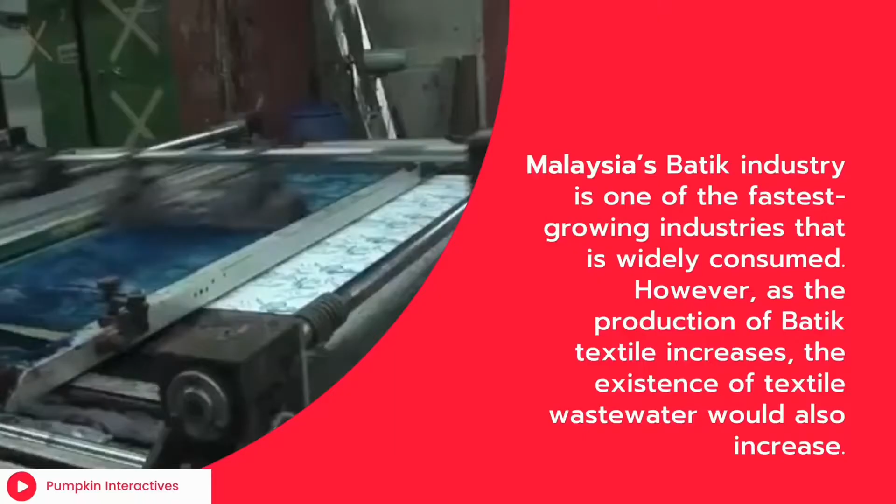Malaysia's batik industry is one of the fastest growing industries that is widely consumed. However, as the production of batik textile increases, the existence of textile wastewater will also increase. Hence, Bleka is invented for neutralizing and filtering textile waste such as bleach before releasing it to the river. As a result, Bleka can easily reduce water pollution, thus ensuring clean and safe water quality in Sungai Hiliran Terengganu.

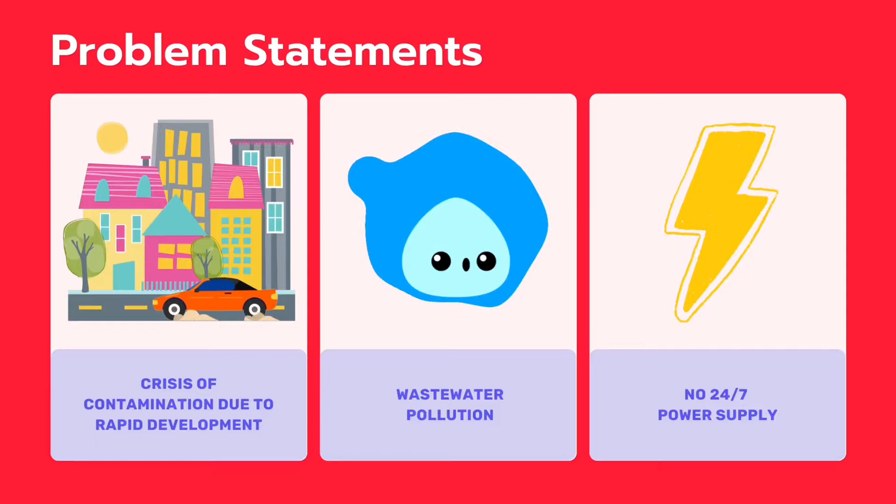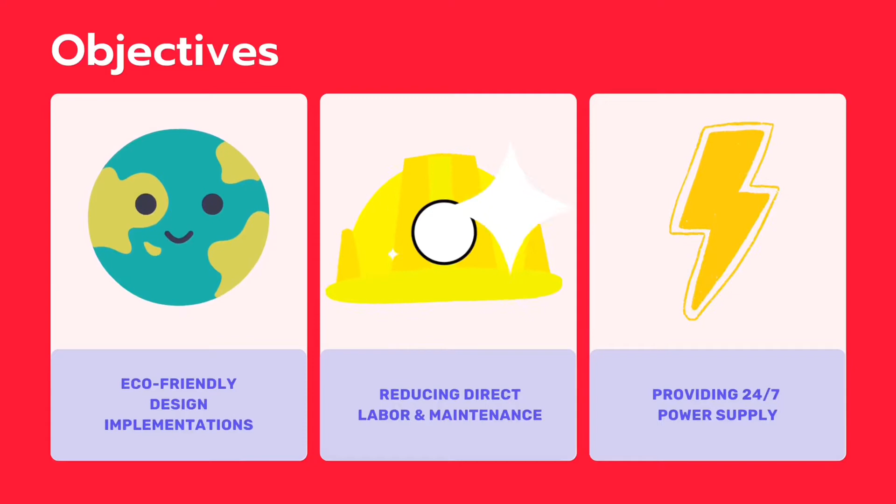Our problem statements are the crisis of contamination due to rapid development, wastewater pollution, and no 24/7 power supply. Our objectives are eco-friendly design implementation, reducing direct labor and maintenance, and providing 24/7 power supply.

According to Malaysian Investment Development Authority, textile industry in Malaysia is our nation's 30th largest exporting industry. Batik industry alone contributes a lot towards the economic growth in Malaysia according to Sridewi 2011. This industry also produces textile wastewater, which is the most polluting among all industrial sectors such as pharmaceuticals, pulp and paper mill. This comes from the bleaching process.

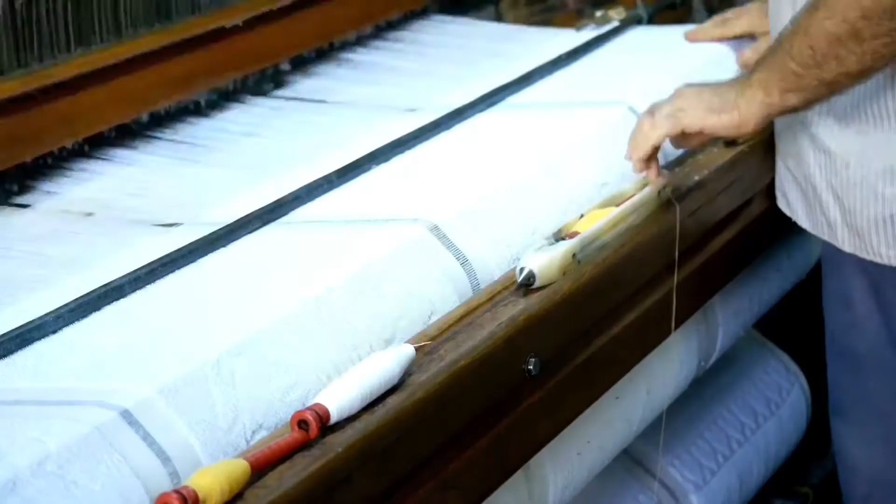Bleaching process is an essential step in the pre-treatment of textile. Besides this industry, rapid development also contributes to contamination of the waterway due to indiscriminate garbage disposal.

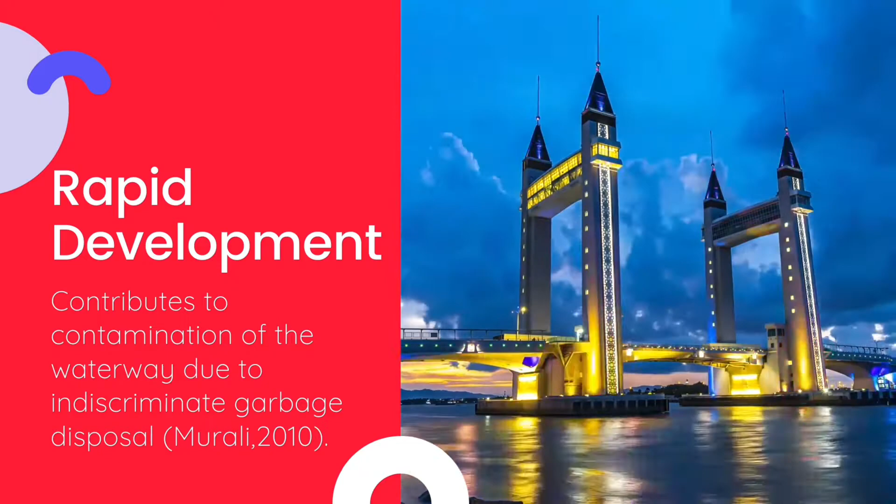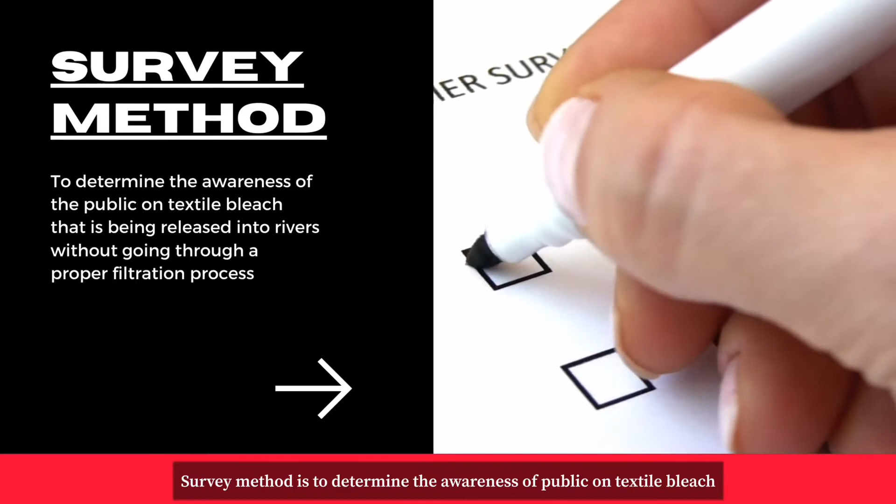Survey method is used to determine the awareness of the public on textile bleach that is released into the river without proper filtration process.

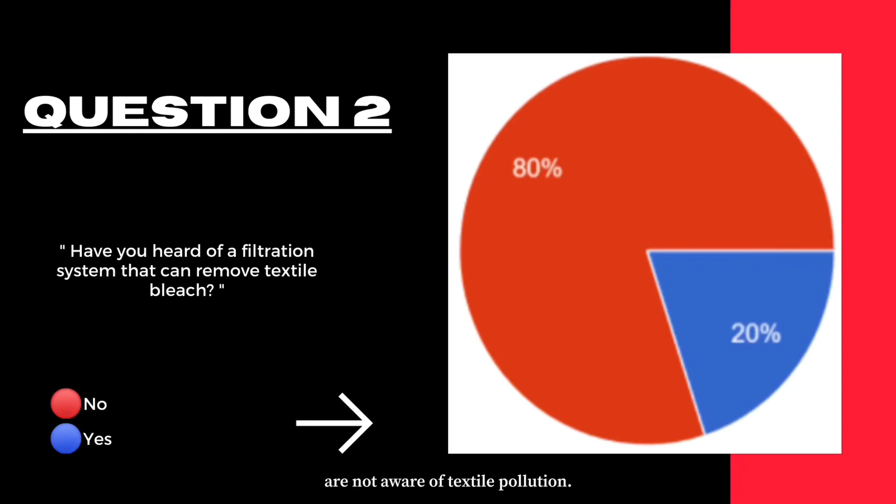From the previous question, we can see that the majority of our respondents are not aware of textile pollution. Therefore, it is explainable why 80% of respondents voted no, because they never heard of a textile bleach filtration system.

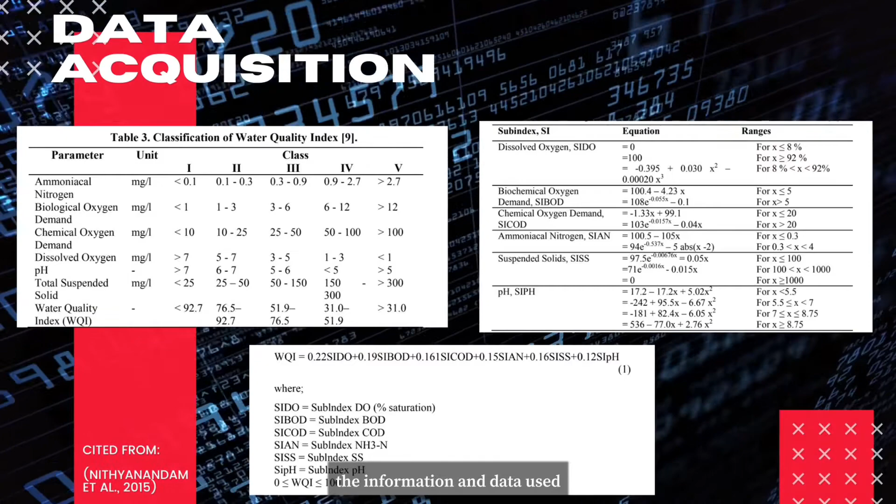For data acquisition, the information and data used in this project for calculation of water quality index is based on a Journal of Engineering, Science and Technology case study of analysis of water quality in Sungai Batu Ferringhi.

For testing viability of the project, the project is viable since the cost of Bleka is worth it for a long-term run and will affect local communities who live within the area.

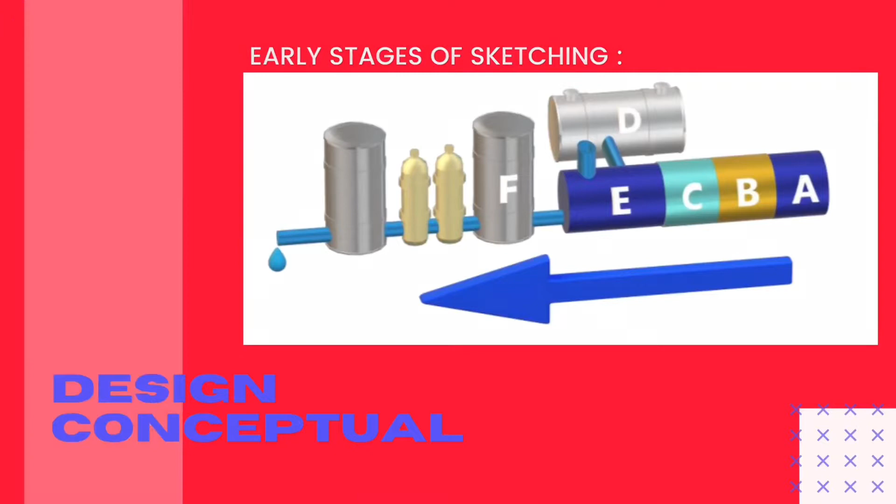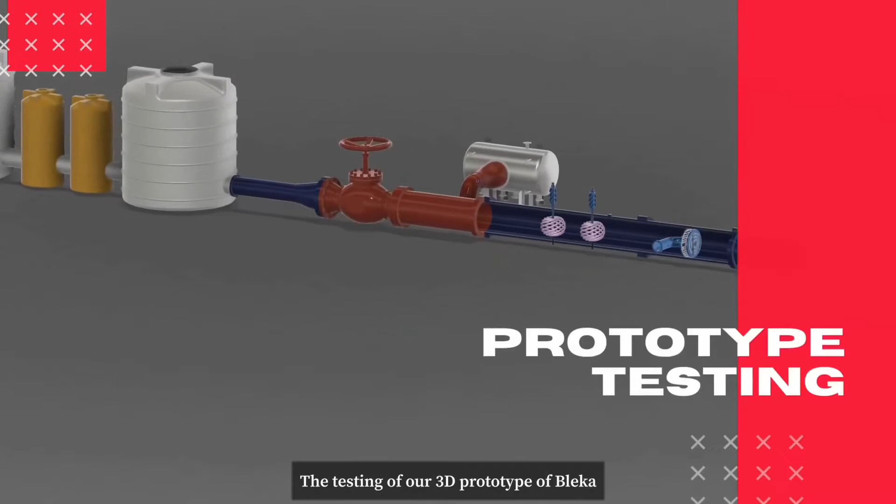This is the early sketches of our project Bleka. This is our prototype fabrication from the early stage until we reach the final stage of the Bleka invention. The testing of our 3D prototype of Bleka was done by using simulation in Fusion 360. And these are the final products of Bleka, big and small scale.

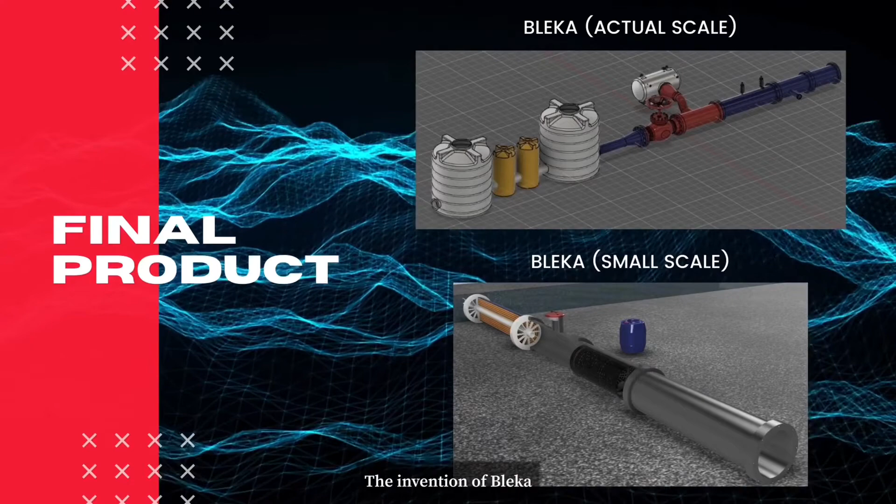The invention of Bleka met our objectives, which are the implementation of eco-friendly design, reduction of labor and maintenance, and providing 24/7 power supply.

The first method is to brainstorm ideas among all team members based on the themes given. Data analysis could be done after collecting surveys on the project for analyzation. Understanding the failures and doing improvisations on the sketches produces a great quality final product.

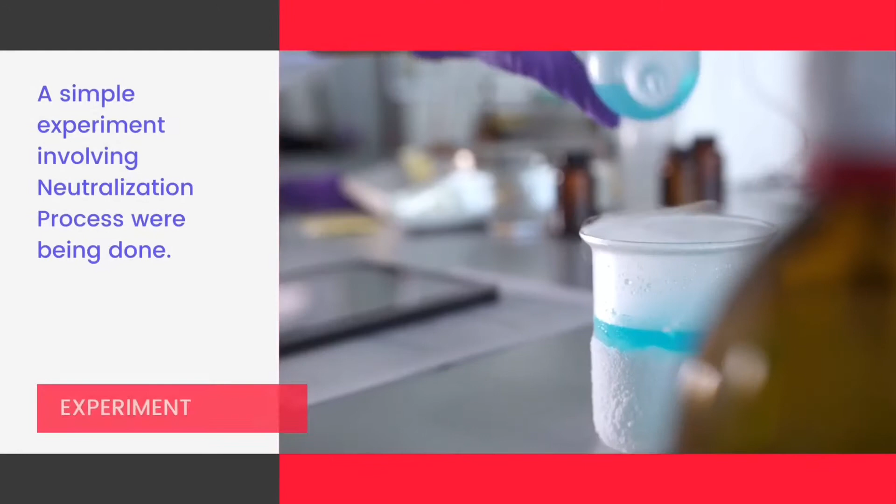A simple experiment was set up to observe and calculate whether the neutralization process is a success or not. Finally, a final report on the failures and improvements of the project will be reported and submitted by week 12.

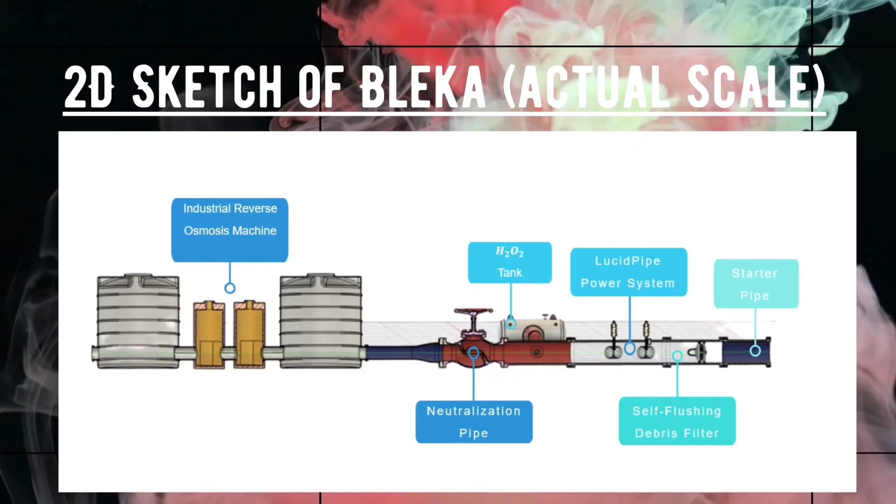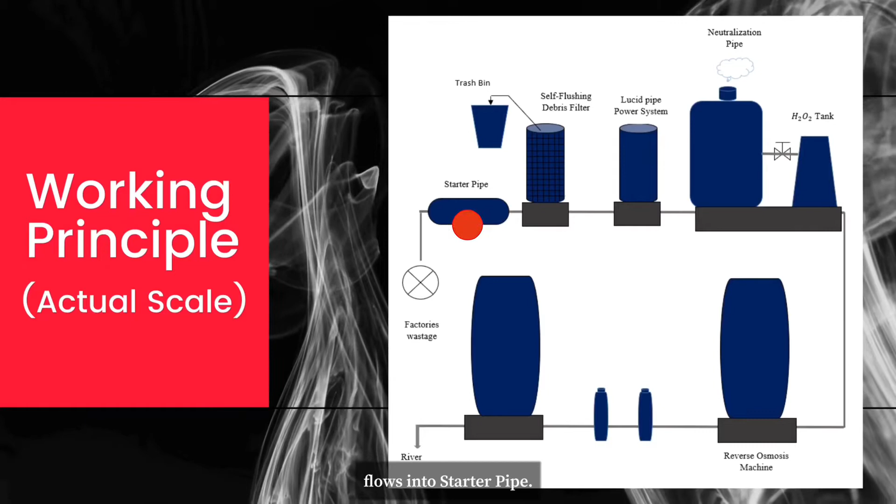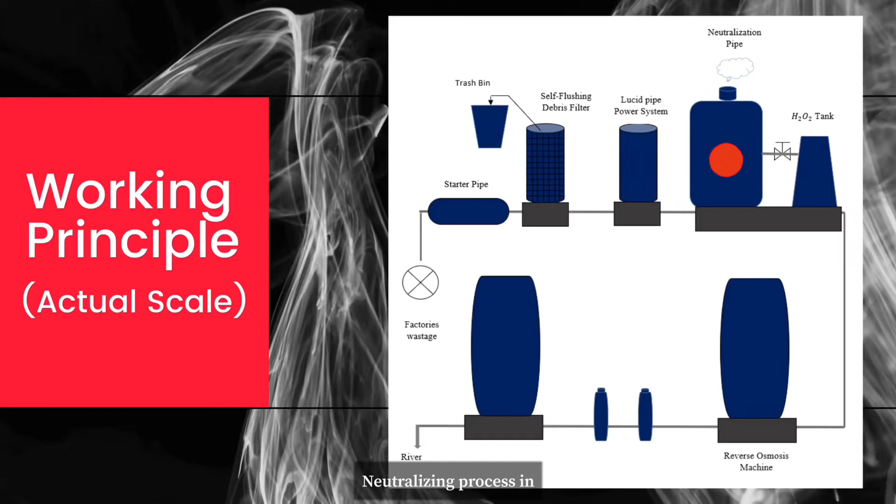Bleach wastewater from the textile factory flows into the starter pipe. Self-flushing debris filter filters out fabric scrap to avoid plugging issues. Lucid pipe power system generates electricity by water motion. Neutralizing process occurs in the neutralization pipe. Hydrogen peroxide is used to neutralize bleach wastewater. SSSV prevents blowout in case of sudden pressure increase. Industrial reverse osmosis machine cleans out any impurities before releasing into the river.

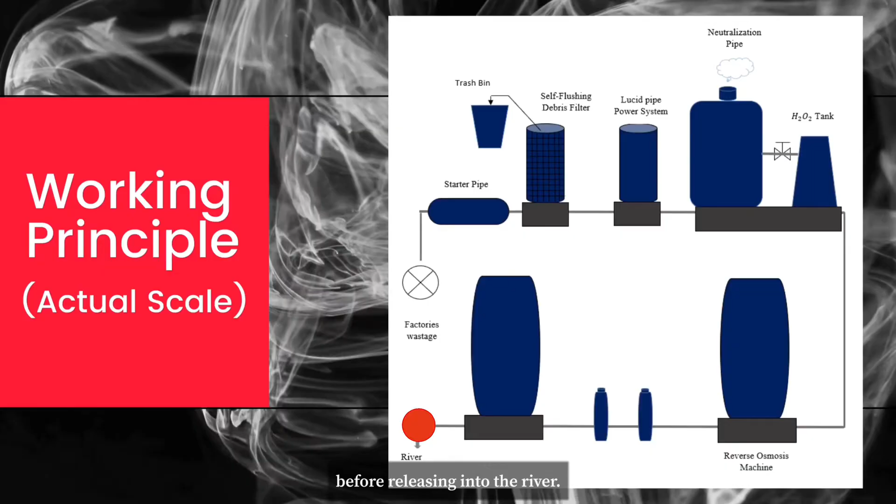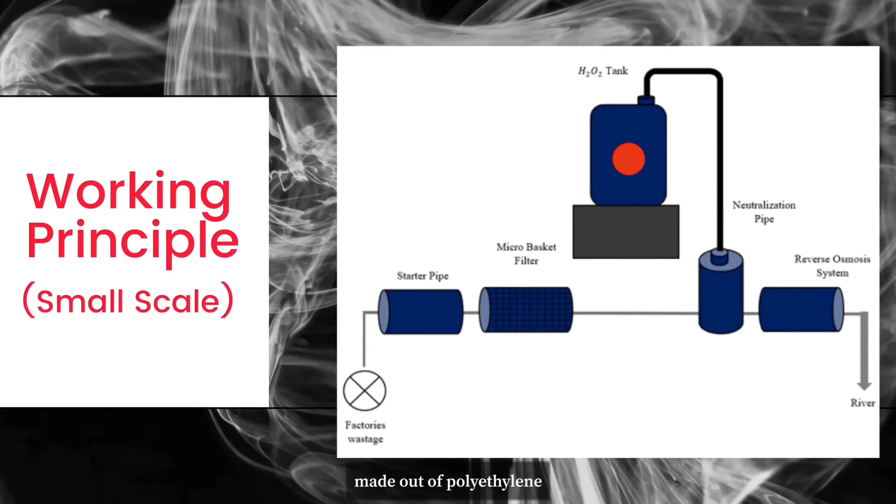Bleach wastewater from the textile factory flows into the starter pipe. Microbasket filter filters out fabric scrap to avoid plugging issues. Neutralizing process occurs in the neutralization pipe. H2O2 tank made out of polyethylene stores hydrogen peroxide. Reverse osmosis system cleans out any impurities before releasing into the river.

Milliliters of both bleach and hydrogen peroxide were measured and pH readings were taken. The two substances are mixed and a reaction occurs. Gas bubbles form, indicating oxygen gas.

Once the reaction is done, the pH value is taken again to be recorded. Based on the byproduct of the equation, salt plus water will form salt water, where desalination is needed using a reverse osmosis system.

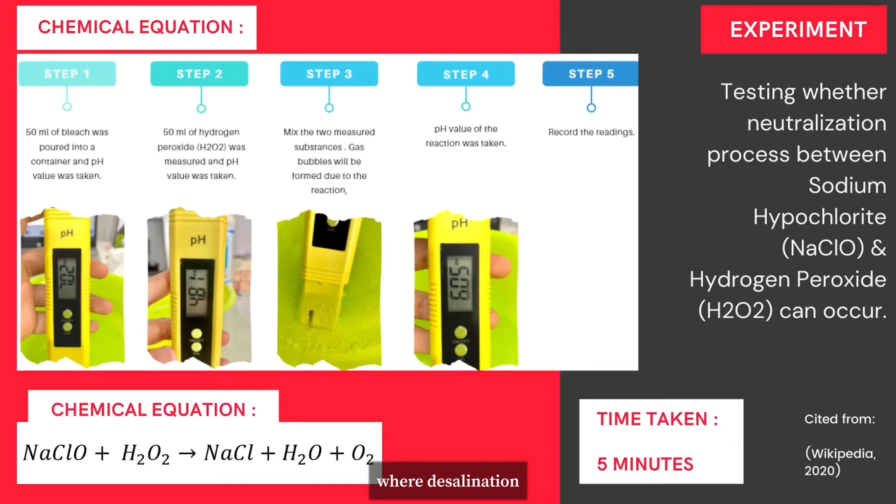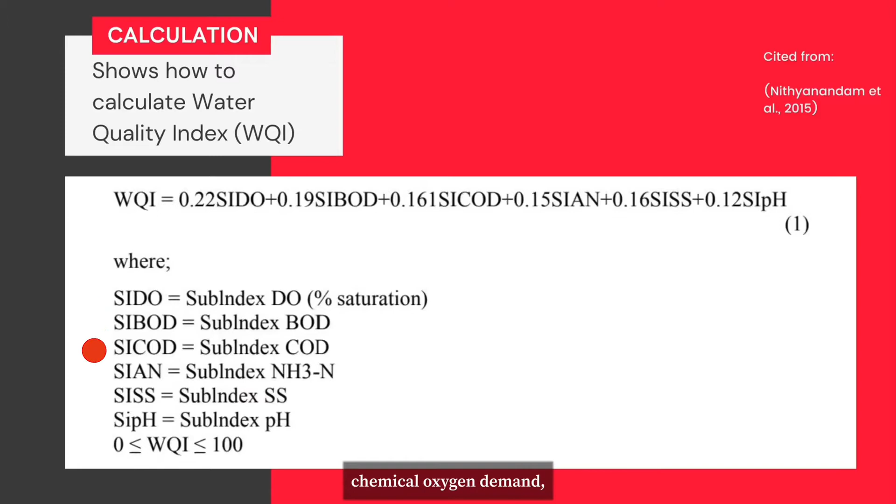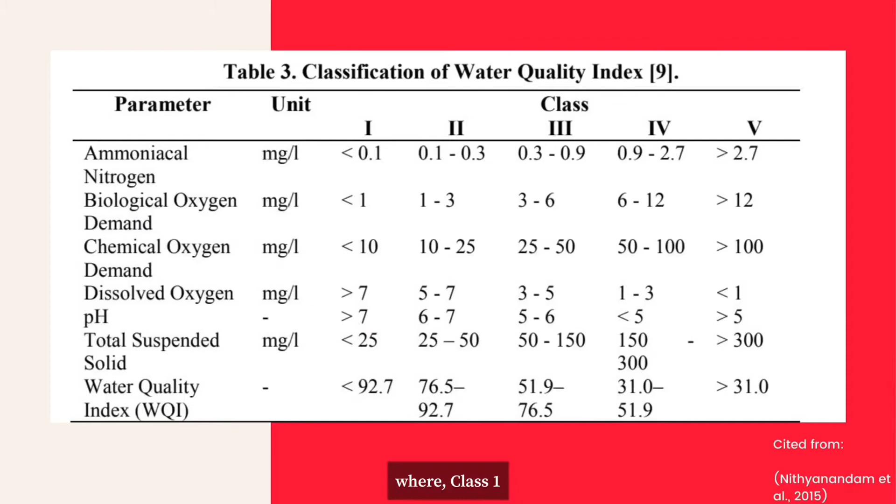The formula for WQI is stated as shown. The parameters used are dissolved oxygen, biochemical oxygen demand, chemical oxygen demand, suspended solids, ammoniacal nitrogen, and pH value. The classification indicates whether the water is good or bad, where Class 1 is identified as good and the opposite goes to Class 5.

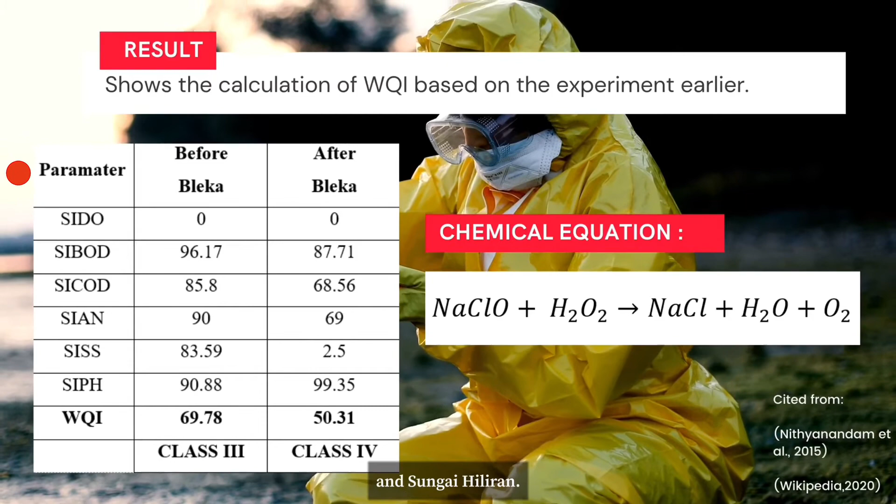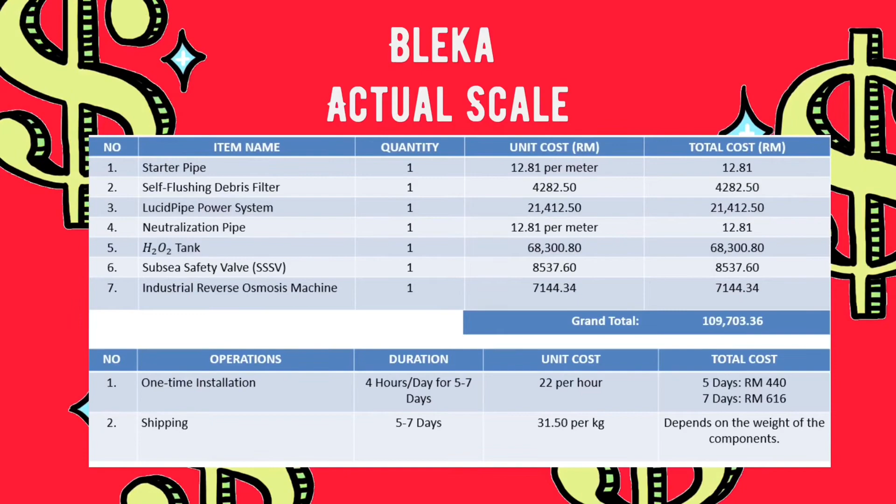Our main targeted users for big-scale Bleka are the DOE and MOSTI. Yes, Bleka might be a little bit pricey, but looking at the bright side, Bleka was created with materials and components that have high durability as well as high damage tolerance. Therefore, Bleka can last up to 30 years without the need of maintenance.

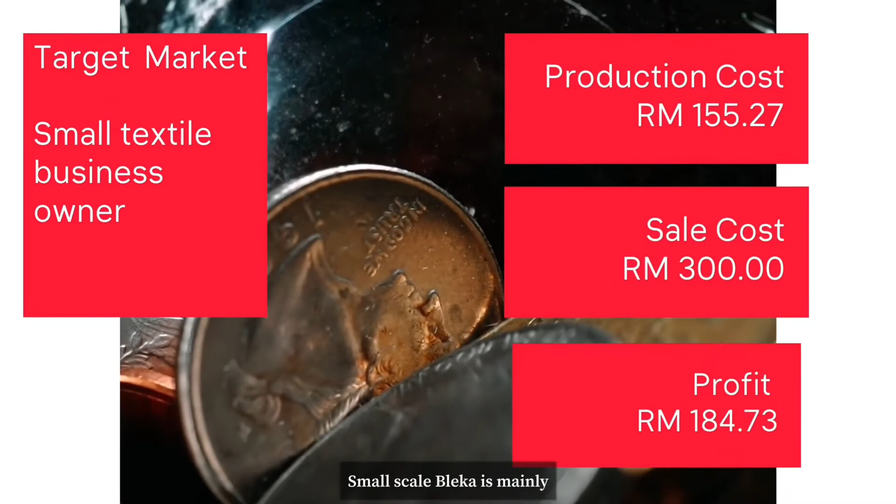Small-scale Bleka is mainly designed for users who run a small textile business at home. However, bleach wastewater is not supposed to enter the septic tank. So this is where small-scale Bleka comes in handy, where it can be connected to the piping system of the house.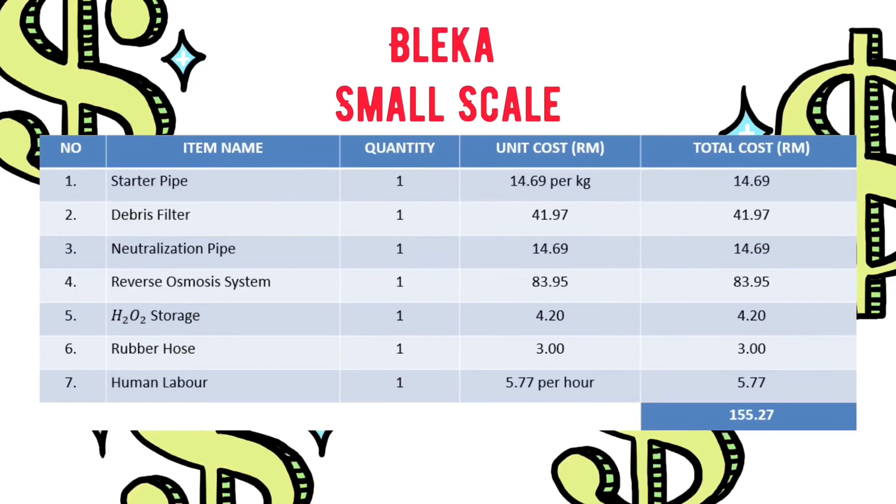The price and life expectancy is what makes Bleka stand out even more. Judging by the water pollution situation that is getting worse, the government desperately needs a solution. Therefore, Bleka is definitely worth the purchase.

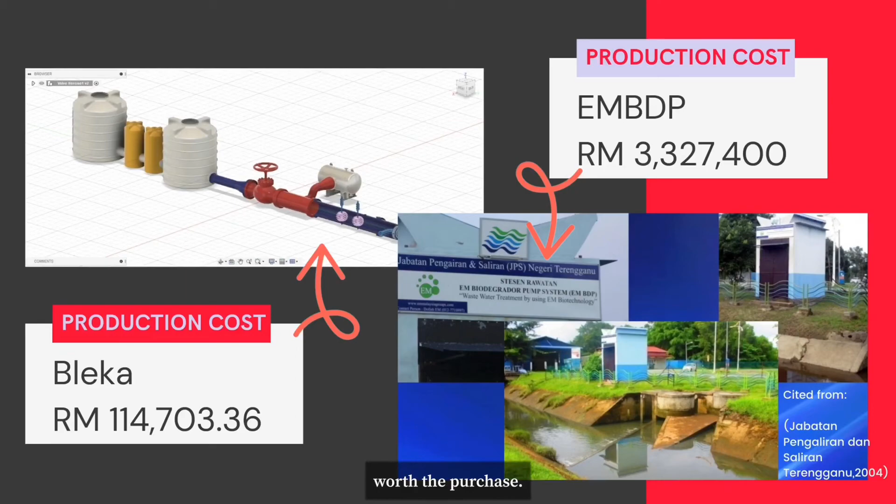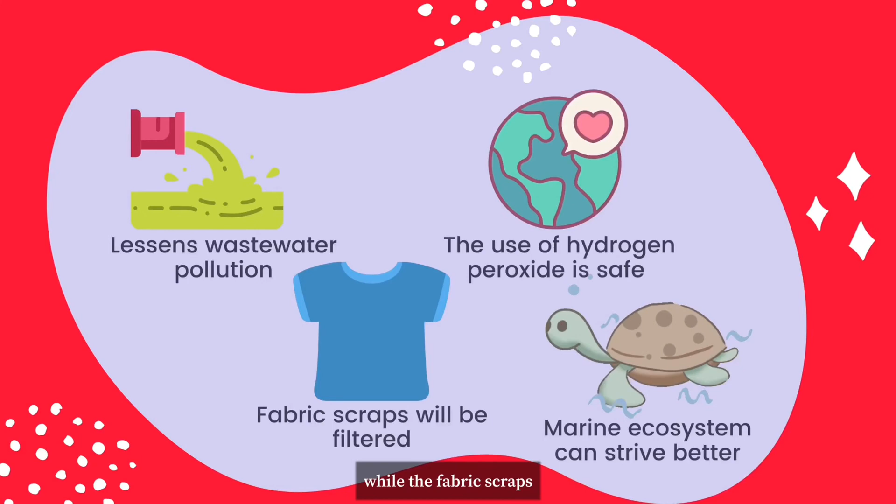In conclusion, Bleka was created by our group with a thought to achieve our objectives, which are to lessen wastewater pollution while fabric scraps are filtered using a self-flushing debris filter, and lastly to help marine ecosystems thrive better. Therefore, for future recommendations, laws related to pollution at all levels should be created, as well as using systems that maintain natural resources and energy in order to decrease environmental issues.